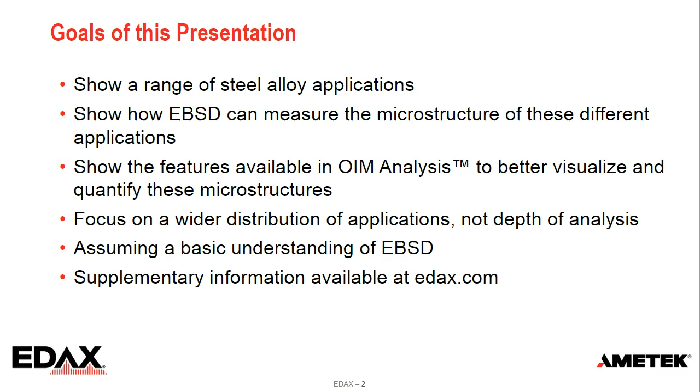I'd like to start by acknowledging a number of people who've contributed to this data: Stuart Wright, René de Kloe, and Will Lenthe at EDAX, John Carpenter, who was at EDAX a few years ago, Suzuki-san from TSL Solutions in Japan, Josh Kacher, Tim Ruggles, who helped on some HR EBSD work, Tom Voisin from Lawrence Livermore on some additive manufacturing samples, George Vandervoort for some nitrided steel samples, Tracy Nelson from BYU for some friction stir weld results, and Ryan Dehoff from Oak Ridge. And of course, this list is not comprehensive. As Jonathan said, I've been doing this for a lot longer than I like to actually count now. I've had conversations with people in the steel industry using EBSD and OIM, talking about their different applications, and bring a lot of that into putting this together.

So why steel? Why did we pick this? It's the most important engineering construction material in the world. And this comes from theworldsteel.org, these values that we'll go through.

When I've looked at it, I do a lot of work trying to see where EBSD is being used via publications. Somewhere between 57 and 65% of the papers published last year, looking at either Science Direct or Google Scholar, involve steel, at least as a keyword. So it's a lot of applications, a wide range of applications of microstructures.

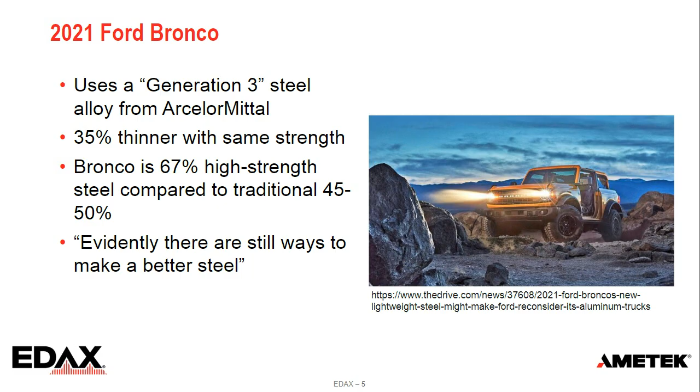To start, I wanted to talk about some friction stir welding and show some examples from a steel sample. If you're not familiar with friction stir welding, it's a solid state welding technique. It's of interest for steels because it works with dissimilar metals, can be used to weld steel to aluminum, and the mechanical properties come out better compared to other alternative welding techniques. There are different microstructural regions, and they make really pretty pictures for EBSD, as you'll see.

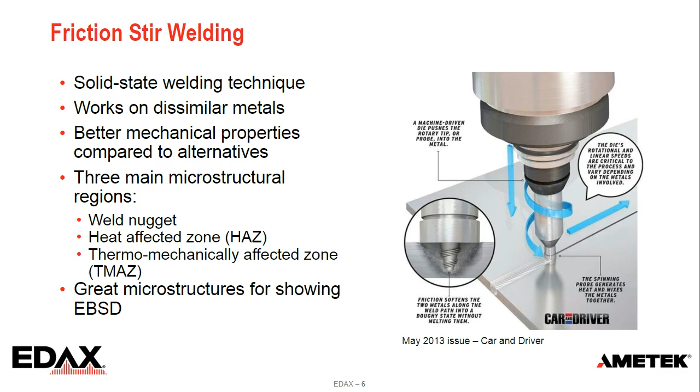You can kind of see a little diagram here of how this goes: the tool is pushed into the metal that's being joined. It stirs around, and the friction and the heat creates a doughy type structure. So it mixes things without melting - it's a solid state technique. This is from Car and Driver magazine that covered friction stir welding a few years ago.

This is an example from a friction stir weld, a stainless steel alloy, using what we call a montage scan. So it's covering a large area, 31 millimeters by 7 millimeters. Basically we take a field of view, collect the data, move the stage, take another field of view, repeat that, and when we're done, we stitch them all together to see the microstructure. This is looking at an area with a 10 micron step size.

The map I'm showing here is what we call an orientation map, where the colors correspond to the orientation, in this case coming out of the surface normal direction. That will be the standard direction we use in the presentation unless I note otherwise. We have the little colored stereographic triangle that shows how the colors correspond to orientation. If it's red, it's an 001 cube face orientation for the cubic faces in steel. If it's blue, it's a 111. We see the weld nugget there in the bottom center, a bit on the top where it's transitioned, and the base metal to both sides.

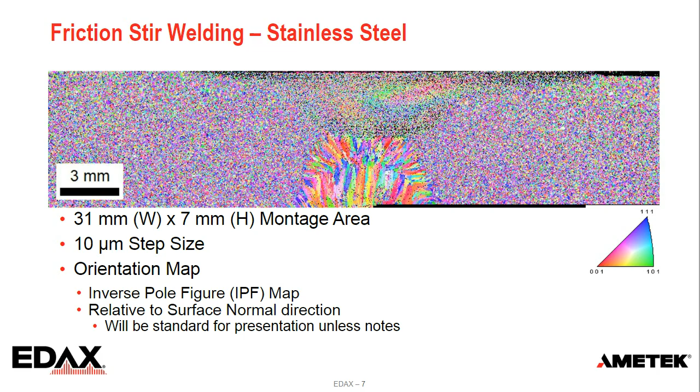If we zoom up along the interface, this shows what we call our image quality map. Image quality is a measure we get from measuring the average intensity of the detected diffraction peaks in the Hough transform. We measure that value, then map the variation as a grayscale image, and see different contrasts.

We can see an example of this from a different steel - this is a partially recrystallized steel. IQ map contrast can come from phase contrast, which is just a difference in scattering from atomic number. It can come from, the generic term is strain - as we deform the lattice, the diffraction is not as sharp, so the peaks are not as bright. Crystallographic orientation also matters: some orientations will have more lines or more poles in them, so they'll end up brighter in the Hough transform. Also topography and grain boundaries.

As we come closer to grain boundaries, the patterns can start to overlap and the overall intensity decreases. This slide shows an example of a recrystallized pattern and a deformed pattern. You can see the sharpness difference.

You can kind of see the intensity difference, but if we map that out on a grayscale map, you can clearly see the recrystallized grains are bright and equiaxed. The deformed grains are much darker and more elongated in the microstructure.

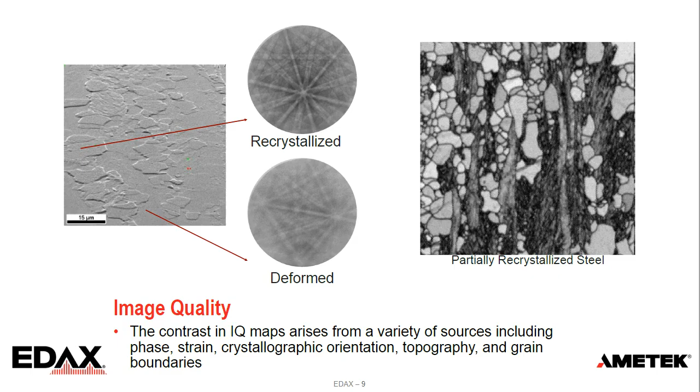Once we have those orientations, what we do with EBSD and with OIM is we typically calculate grains. When we talk about grains, we define a grain in terms of a tolerance angle and a minimum number of pixels.

So if we have our measurement grid, and we typically measure things on a hexagonal grid, this puts more of a packing factor of measurement points on a specific area. Each point has 6 equidistant neighbors, so we can sample more neighbors of the same distance for local kernel measurements.

We'll talk about that when we talk about some of those metrics. So we start with our first point that has some orientation. The orientation is shown by a little unit cell, and we've colored it red.

We check the next pixel. If the misorientation between that pixel is less than our tolerance, then we say it's within the same grain, and we repeat this process. We check this one, it's still within the same grain. We check this one, it is not within the same grain.

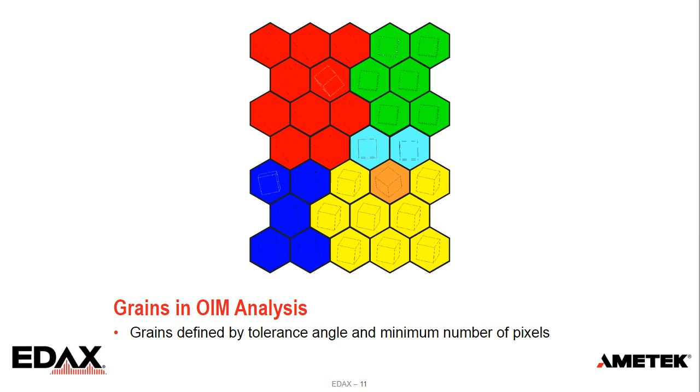As you go to smaller and smaller step sizes, you're able to resolve finer and finer grains, so being able to adjust that threshold matters - if you go to coarser step sizes, that may require a different threshold.

Once we've determined the grains, we can then randomly color that. We call this a unique grain color map, or just a grain map. The colors are such that no 2 adjacent grains have the same color, so it really shows morphology, the size and shape of the grains.

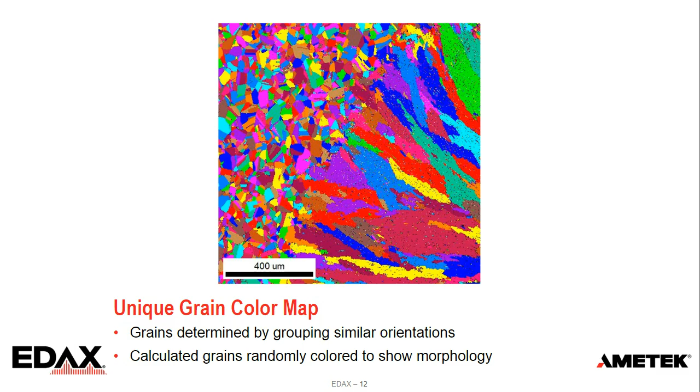We can define this grain size distribution a number of ways. I think the default often that people think about is in terms of diameter. That's an easy one to get out - that's the default, is to show diameter.

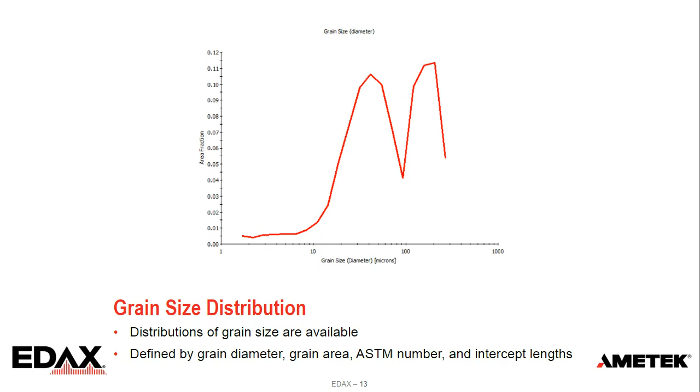But of course, as we look at some of these grains and grain shapes, diameter doesn't always make sense when they're non-equiaxed grains. So we can do grain area, ASTM numbers, intercept length - there's a number of different ways of representing grain size that can be applied to the particular microstructure. And then we can do some fun things to try to link these together.

So this is something we call interactive analysis. I've just gone into that histogram on the left, the grain size histogram, and drawn over a color scale. The smallest grains are yellow, mid-range grains are blue, and the largest grains are red. Once those colors are applied to the histogram, they can also be applied to the map.

So we see that there, and sure enough, the weld grains are larger, they're red. The base metal is more in the middle range. The small grains are there, yellow, but there's just fewer of them and they're smaller, so they're harder to see.

The other thing I'd like to point out, with EBSD we have the choice of including or excluding the edge grains. These grains that we see touching the edge, we're not measuring the full grain, so mathematically you probably don't want to include them in your distribution. But from a map, it makes it look better to color to the edges - it looks a little weird if you throw them out. So that's why I've shown them this way.

But if I'm trying to extract it correctly, I generally will exclude those. And I highlight the coloring scheme. This is when I make my typical joke that I'm colorblind.

And Stuart Wright, one of our programmers, has decided to make the first two colors in a lot of our color palettes red and green, I think because I beat him in golf once.

But we have the ability to customize and adapt coloring schemes depending on what we want to show. I'll show some examples of this.

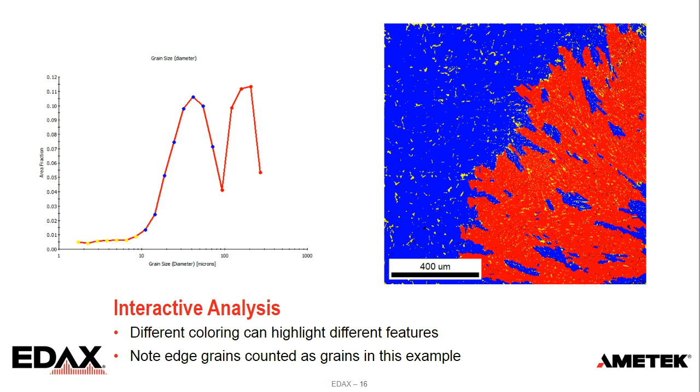And once you've done this highlighting, we can create what we call partitions or subsets of data. In this case, I've taken just the middle region and said everything that falls into this, let's take that as a subset of data, and then we can do our own analysis.

So I could look at, say, the grain size or the texture just from that data. We could also take anything that was not highlighted and create another partition to compare those really easily. As we talk about some of our phase analysis, there are times we do stuff like that, and I'll talk about that in a few slides.

One of the things EBSD really excels at measuring are grain boundaries and what I've called here the location and character of grain boundaries. What that means is we can tell what the misorientation between 2 pixels are - we measure that angle. We use that when we created the grain tolerance angle.

So if it's a misorientation that's between, say, 20 and 25 degrees, we can color it one value. If it's between 40 and 50 degrees, we can color it another value. So we can measure lots of grain boundaries with EBSD. It's really the most efficient tool for looking at this orientation information because we can look at a large area with fine spatial resolution.

And so here we've used a color scheme across the entire misorientation distribution. We see where they show up in the map.

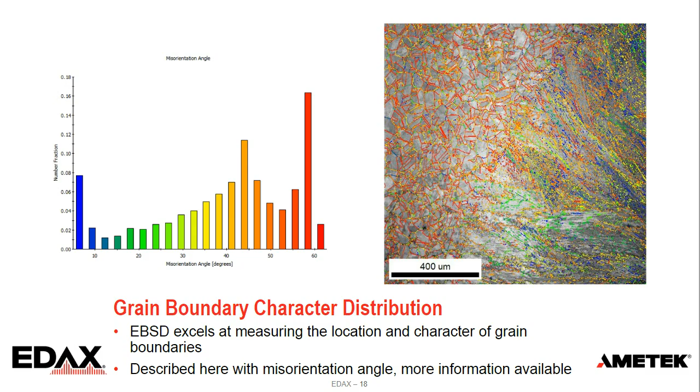We can also measure local misorientations, and it's a little tricky how we choose to describe this. Sometimes it's termed strain. It's really not strain, but that's what it's called, or plastic strain. But essentially, as we permanently deform a material, it introduces misorientations.

And if these misorientations are large enough to be detected with EBSD, we can count them. Typically for regular EBSD, our precision is somewhere around 1/10 of a degree. So when misorientations are higher than that, we can start looking at how they're distributed. We do this in a map called a kernel average misorientation map, or KAM map, where for every pixel, we look at the misorientation between its 6 adjacent neighbors, and we take the average and color it accordingly.

The color scale used here: blue is basically a 0 misorientation. Red would be essentially 5 degrees, and we use 5 often as a cutoff. After 5, it starts to be more of a higher angle, maybe a grain boundary. We can see in this map the weld area has a higher KAM value, a little brighter in the top right than on the base metal to the left, but there's still a good deal of KAM strength throughout the microstructure. We'll show some other examples of how we can count these misorientations.

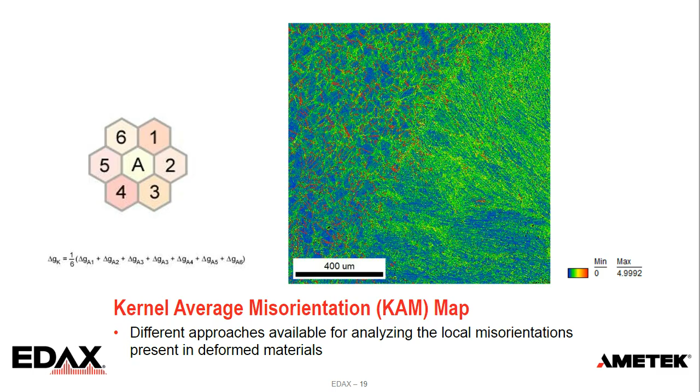We'll also show some examples of going to higher precision with HR EBSD.

Now, I started off with this very large data set to get an idea of a large scale of data. Once we have that data, we can also do cropping. So I've just come in here and said, show me a region of the base metal. It gives us an area. In this case, it's just a rectangle we've pulled out.

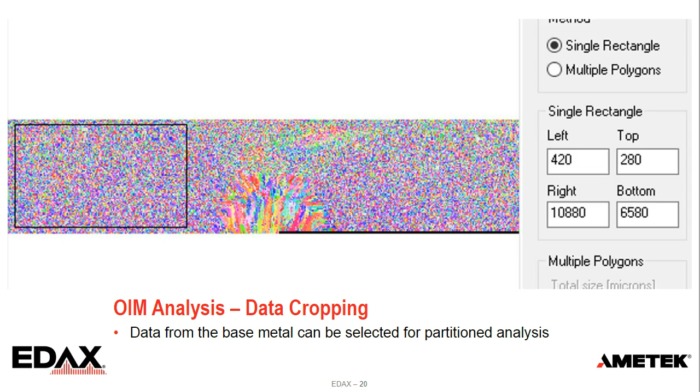Once we have that, we can do what we call texture analysis. Texture analysis is just looking at the orientation distribution of the measured orientation. So it fits a function that describes the distribution. From that, we can get an idea of what we call the strength of a preferred orientation. I realize I didn't put the color scale, but essentially...

These colors on the pole figures, these images on the right, are what are called pole figures, which show the stereographic projection of the orientations onto the sample reference frame. The center of the pole figures shows the sample normal direction. The A1 shows the top to bottom direction, so A1 is the top of the map, and A2 is the left-hand side of the map. If you use your right-hand rule, you'll see how that aligns with the map.

So what this shows us, if we look at the 111 pole figure, is there's a strong peak in the center, a little bit offset, coming out the center of the sample. That's why when we look at that region, there's a good amount of blue. If we had the scale bar, we'd be able to tell how strong, how much over random that distribution is. We can see it's sort of annular around that, what we'd call generally a fiber texture, at least close to a fiber texture. It's got some funny shapes to it, but we can see it's more randomly distributed around the clock face of that 111. That's what texture can show us.

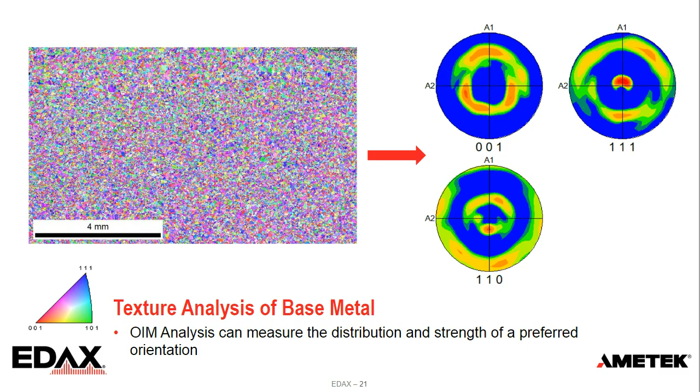I can also come in and crop. I did my best to crop the weld nugget, so it wasn't a rectangle - it's what we call a polygonal crop, trying to crop out those weld nugget grains. Looking at the texture of these, we see it's quite different. There's more of a 001 alignment along the A1 axis.

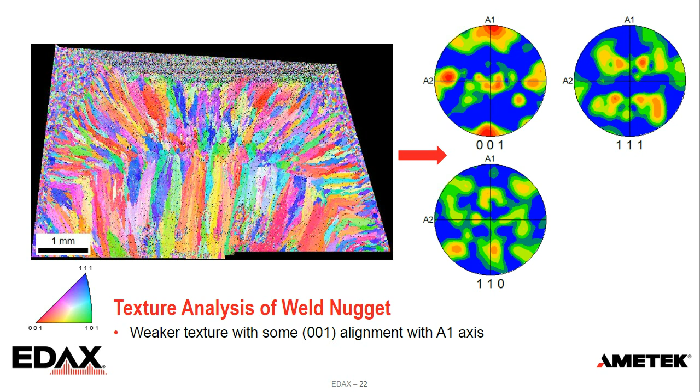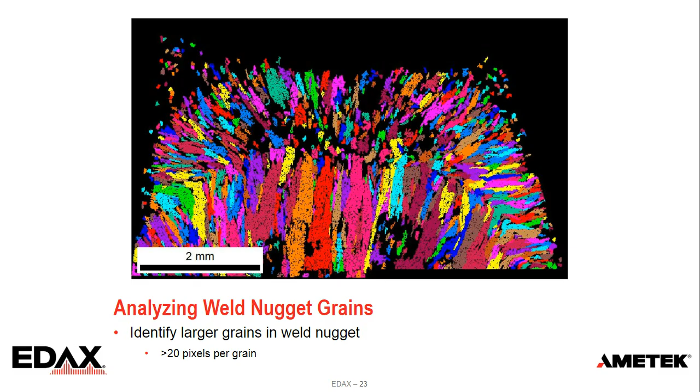Once I have those grains identified, I then fit an ellipse to each grain. So here we fit an ellipse, we determine a major axis and a minor axis, and an angle between the horizontal and the major axis. I've just shown those ellipses in white to show how they fit those elongated grains.

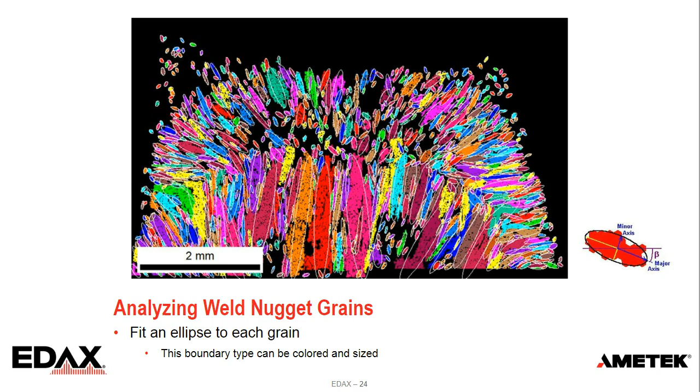So when we're looking at grains, we can get an idea of their shape and shape distribution. But from this, what I'm now doing is, if we look, we can see where the major axes are - I'm showing what crystal orientation is aligned with the major axis. We can see that most of these, or at least a good number, are trending towards the red direction. That gives us an idea if some of that grows preferentially as the grains grow in that direction.

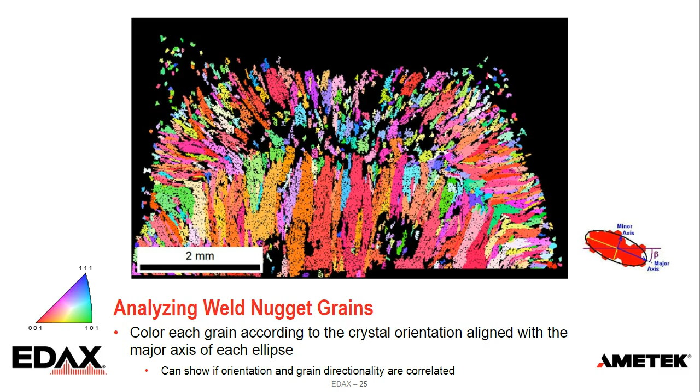And we can see there are a number of grains aligned top to bottom in that 001 axis, which explains that orientation distribution in the pole figures.

So I want to jump to the next application, which is additive manufacturing. I hazard a guess that if you're listening to this webinar, you've heard about additive manufacturing. It's certainly a strong buzzword and market of interest receiving a lot of attention. But additive manufacturing is basically a process where we build up parts, where instead of removing material, we're adding material to create a shape. So this is just an example.

This is from Malvern Panalytical, where you have a bed of powdered material. We hit the powder, in this case with a laser, but both lasers and electron beams can be used. It fuses the powder particles together and solidifies them, so we can use the laser to raster out the area we're interested in. Once the layer is complete, we drop the build platform down, reset the powder on top, and do another layer. So we can build complex shapes generally pretty easily with additive manufacturing.

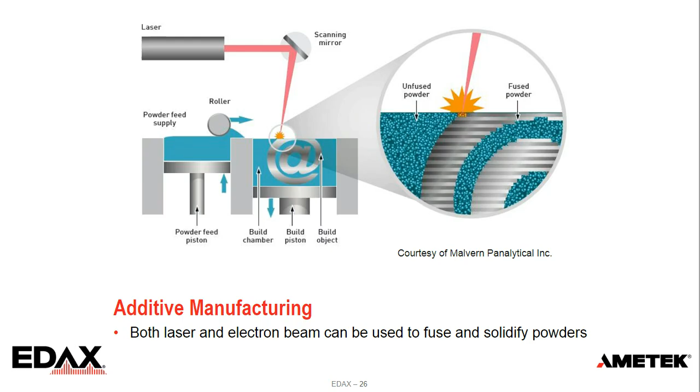So this is just an example using laser powder bed fusion. This is a 316L stainless sample. This shows the orientation map. Again, this is a large-scale montage map, but it's showing what's termed the horizontal build direction. In that case, what it means is that the layers are building up towards us, so we're looking at the very top layer after fabrication.

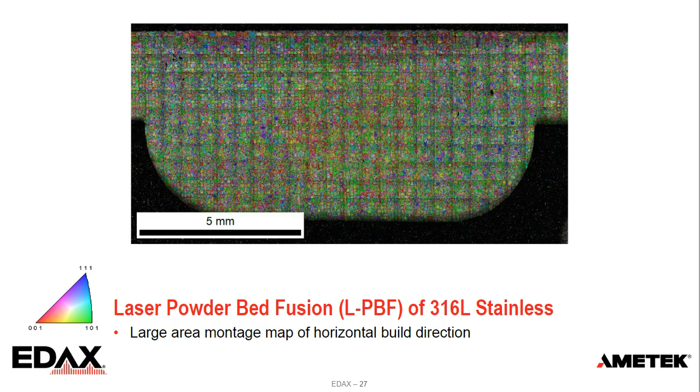You can kind of see there, these are the greenish colors - I hope they're green, this is where my color blindness will hurt me, but they're, to me, a greener color. Whereas if I compare that to what's now termed the vertical build direction, this is where the build plane passed left to right, not out of the plane of the surface for this particular sample. So if we look at those, you can see the shape of these two samples is essentially the same, but they were built in two different directions.

And that's important because if you were to look at a part and if they look the same, you wouldn't realize that, hey, the mechanical properties are actually defined by the microstructure. And if the microstructure is different from one to the other relative to the shape of the part and the directionality of an applied load, you can get very different performance. That, I think, sparks some of the interest in understanding the microstructure of these 3D printed parts.

So looking at these in a little bit higher magnification, you can see that the microstructure is very different between the horizontal and vertical directions. And this is essentially parts of how the energy beam interacts with the particles, the solidification and heat transfer rates going through things, and then how it goes from one layer to the other, the direction of the rasters - there's a lot of things going on in there.

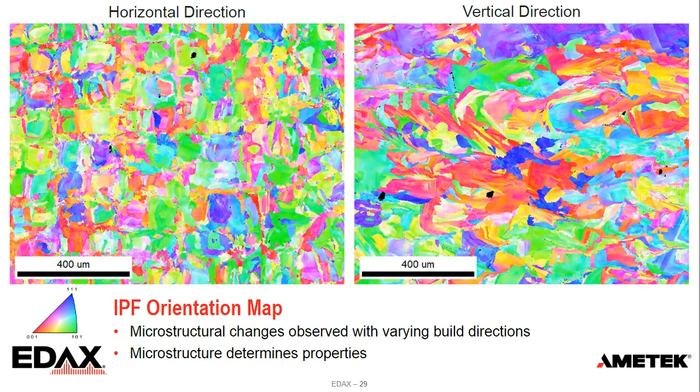And again, if you're able to adjust your build parameters to adjust your microstructure, and microstructure determines properties, being able to measure your microstructure is a key component in really moving forward with this. And this is just a really good example - this is from Oak Ridge National Lab a few years ago. This is in electron beam melting, actually a nickel superalloy, but they varied the build conditions to actually write DOE into the microstructure.

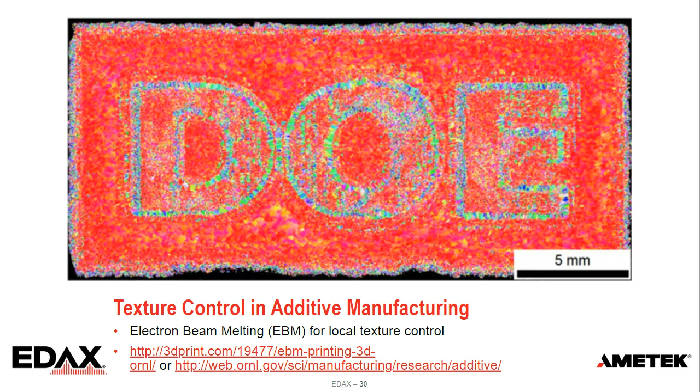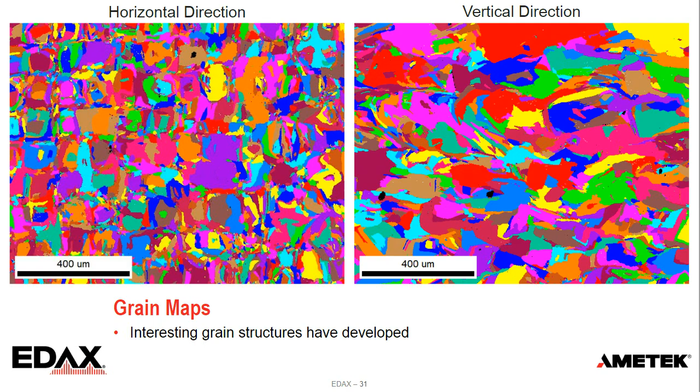In my work, I was looking, or starting to look—it's still in progress—at the structure at higher spatial resolutions. Here we're looking at an area where we can see within some of the grains that the color changes.

There are small changes within a primary color, and that represents small changes in the misorientation. So if I look at this in terms of a misorientation profile...

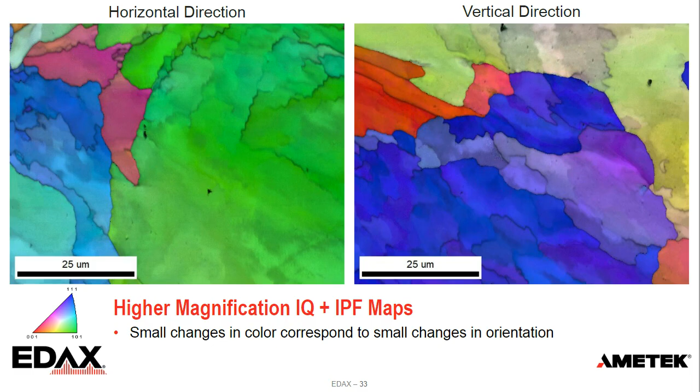You can see on the left I've drawn a line from the bottom to the top within that single grain. I've overlaid unit cells along that profile line. You can see that along the line there are small changes in orientation, and we can see that on the profile on the right, the misorientation profile.

The red line shows the point-to-point misorientation. From point to point, the misorientation isn't changing a lot, but if we look from the bottom to the top, there's a cumulative effect of how that misorientation has developed throughout that grain. There's some structure to that misorientation.

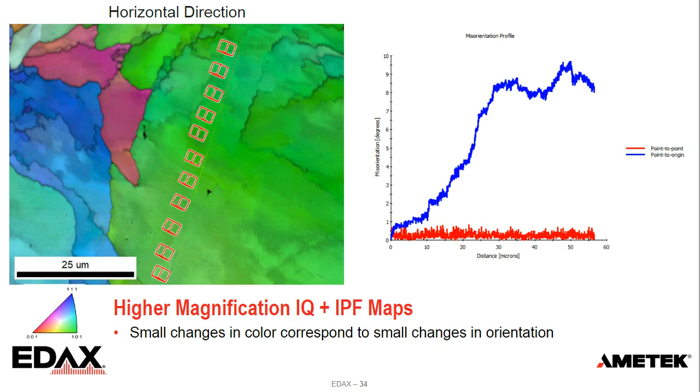We can visualize that with other types of maps. One is what we call a GROD, or Grain Reference Orientation Deviation map. In this case, what we do is calculate a grain, like we showed earlier.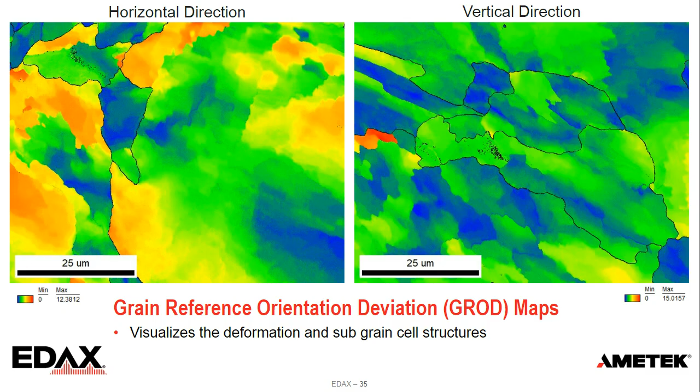Within the grains, you can start to see a cell subgrain structure, kind of a fingerprint of the deformation. We can compare this to TEM results.

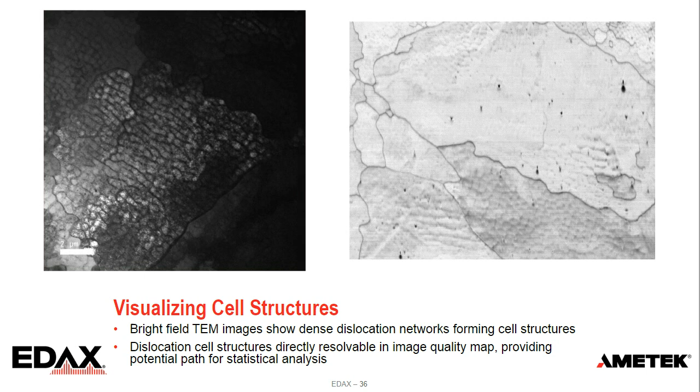This is a bright field TEM image on the left, and you can see that cell structure pretty clearly. On the right is the image quality map from one of those higher magnification images. You can see we can actually detect some of that cell structure in the bottom just through the image quality as well, which I thought was really interesting.

We can look at this with what we call HR, high angular resolution EBSD. This is a technique that provides higher precision in the orientation data, achieved by comparing two EBSD patterns in a cross-correlation Fourier space, looking for small shifts of features within the pattern. This is in contrast to our standard Hough-based indexing.

This data was collected with our Clarity direct detector to get really high quality patterns, looking to see how well we could measure this. From this you can see the orientation map.

You can see there are some slight color changes in this top grain here as far as variations. And when we do this HR-KAM map, you can see how we start to very clearly resolve where some of those cell walls are present.

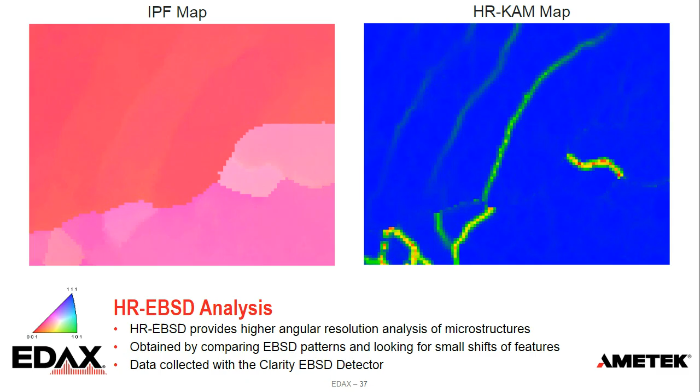This can then be used to measure the GND, or geometrically necessary dislocation density. This is a measurement that's based on, depending on what the misorientation is, a certain amount of dislocations necessary to create that angular change. It's the curl of the orientation field that's used to do that calculation, so we can figure out where the GNDs are present to visualize those.

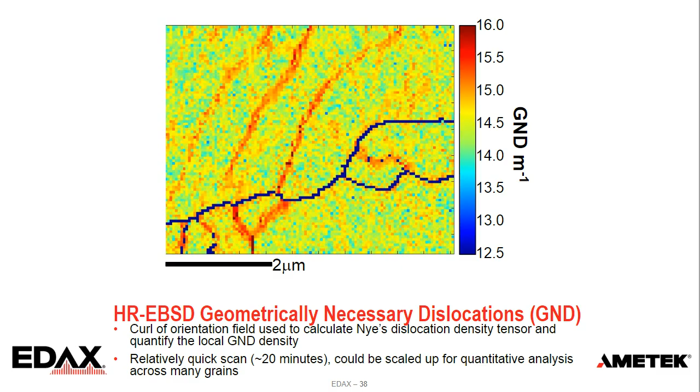Once we have that, we're also able to look at the stress and strain that comes out of that cross-correlation analysis. This shows a profile line going horizontally across some of those cell walls, and we can see the stress state along that, going from a state of compression to tension along different parts of the dislocation structure.

So that's—I want to say it's relatively new, but it's been around for a while now—more information we can extract from the EBSD patterns.

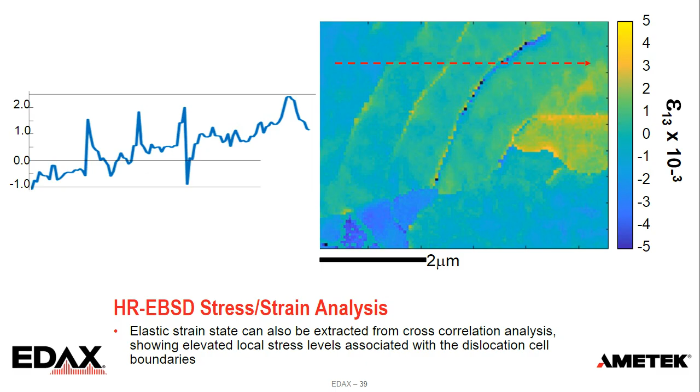The next example I want to talk about is TWIP steel, or twinning induced plasticity steel. You're probably familiar with this curve here, of strength versus elongation or ductility, kind of a banana-shaped curve. A lot of work is going into pushing the properties to enhance both strength and elongation. You want materials that can do both.

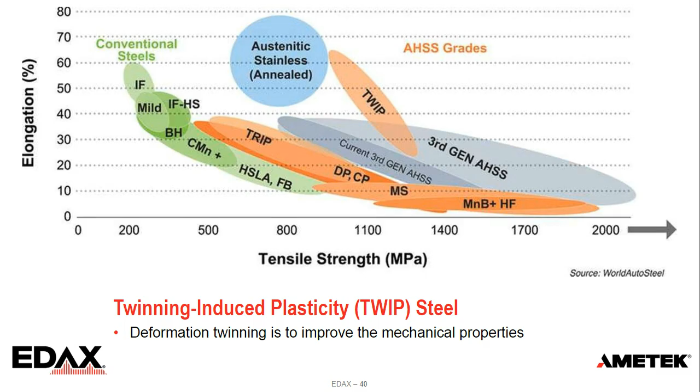This is a little diagram from WorldAutoSteel. For TWIP steels, deformation twinning, and being able to measure and understand that, is what's used to achieve these superior mechanical properties.

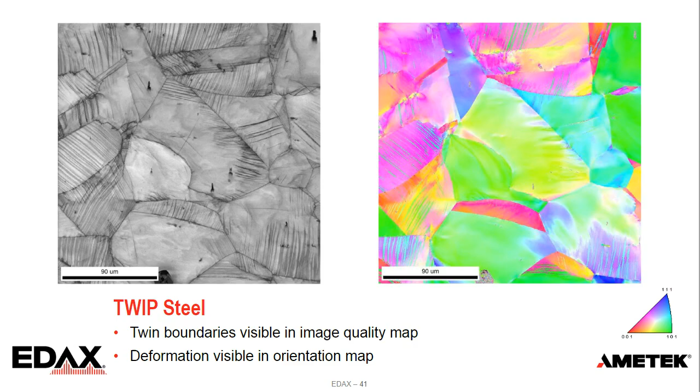This is an image quality map of a TWIP steel. You can see the twins come out as those parallel linear features within the microstructure. We can see the orientation map on the right, and you can see the deformation in that orientation map as variations of colors. I think they're really pretty in terms of variation, but you can see it a lot in this bottom right one where we transition from blue to greens in the triangle. There's a lot of misorientation and twin boundaries present in these microstructures.

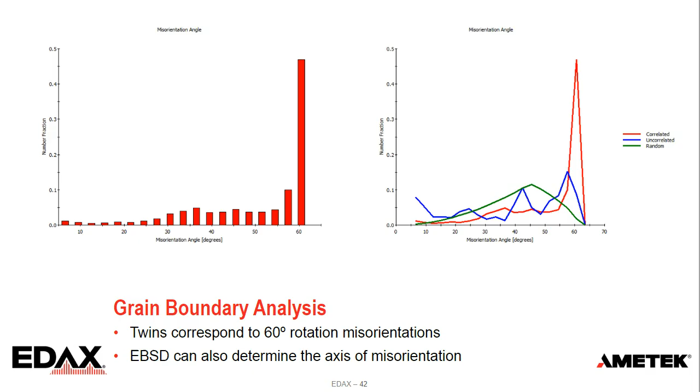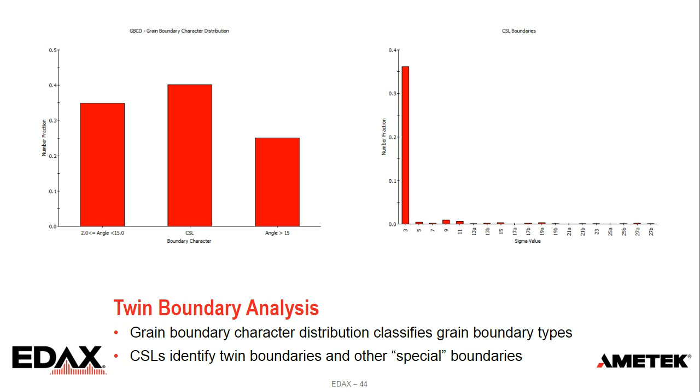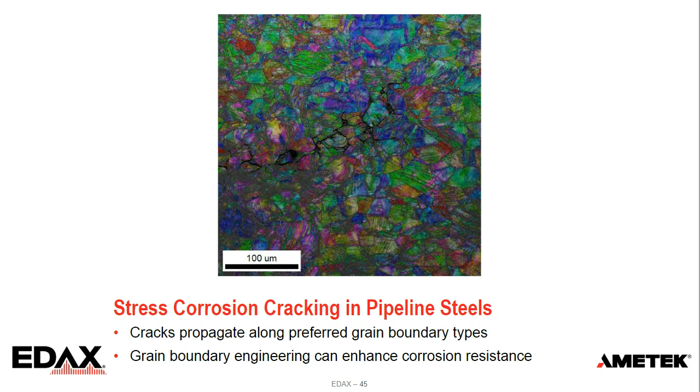This can be important for something like stress corrosion cracking, in a pipeline steel. This is an example of a crack going through a piece of this steel. The cracks tend to propagate along specific grain boundary types, and they generally try to avoid going through a twin boundary. There's work called grain boundary engineering, where materials are subjected to different deformation and heat treating cycles to improve the number of twin boundaries and enhance corrosion resistance.

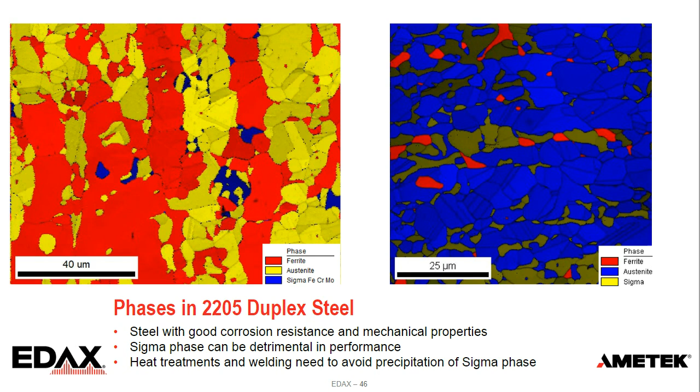In this case, these three phases are crystallographically different. What I mean is, austenite, one of the phases in steel and iron, is face-centered cubic, or FCC. Ferrite is body-centered cubic, or BCC.

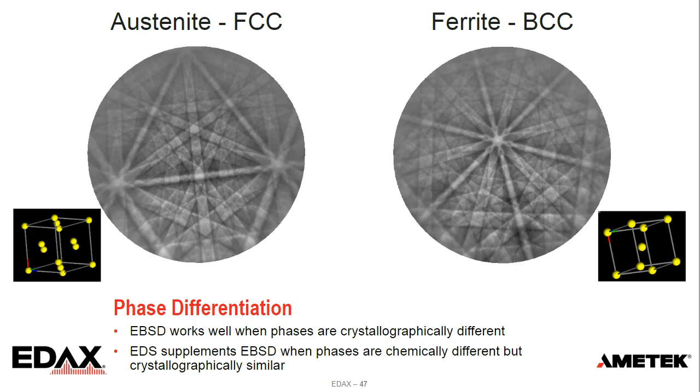They're very distinct crystallographically, so the planes that diffract are different, and the projection of those planes onto the EBSD detector are different. For Hough-based indexing, we're measuring the angles between these planes, so if different planes are diffracting, the angles are different, and it's easy to tell these phases apart. When structures become more crystallographically similar, that's when EDS can supplement EBSD.

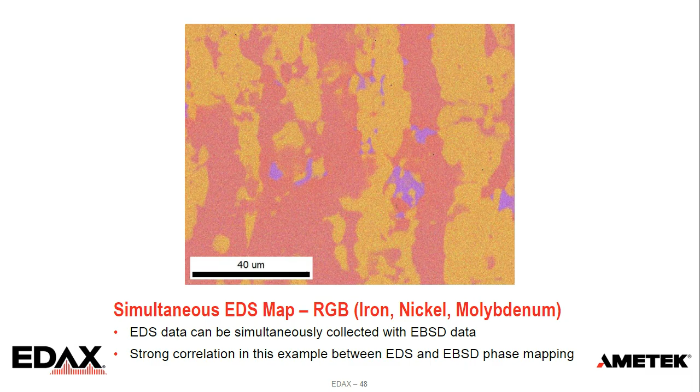So it's very easy to collect simultaneous EDS and EBSD data now in a modern EBSD system. Both the EBSD and EDS detectors and the SEM chambers are all designed with that in mind.

So you can get it, but sometimes it gets to be tricky - sometimes from a physics point of view, sometimes from a sampling point of view.

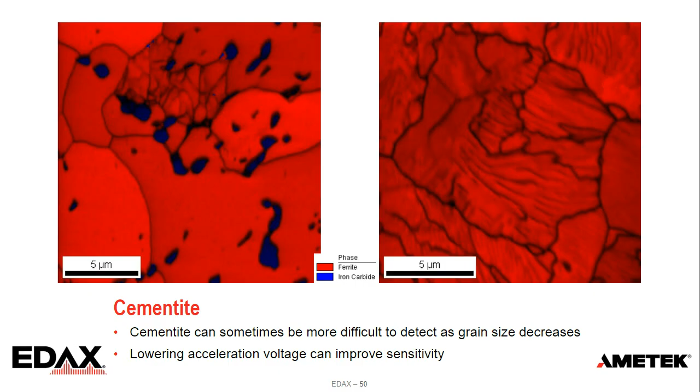This is one we did have a question on that came in before the webinar started, so we wanted to talk about this a little bit. This is a question that's been around for EBSD for a long time - how do we differentiate something like martensite from ferrite? Martensite is body-centered tetragonal, a slightly distorted BCC lattice, distorted from the temperature change and phase transition from austenite into ferrite and martensite, and how that strain is retained in the unit cell.

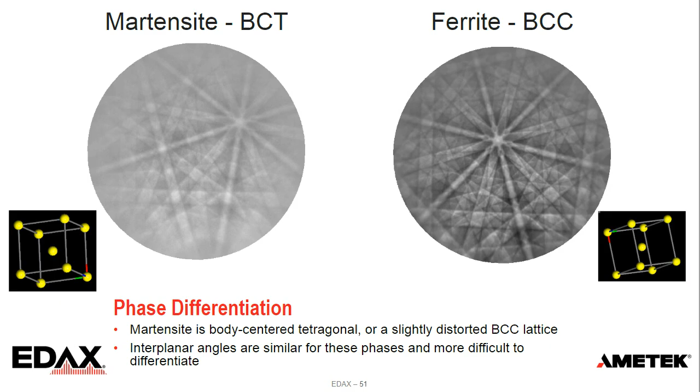So basically that cube is just slightly changed, and one of the tricky things is the slightly can depend on a lot of factors - it's not always uniform in your alloy, and it can vary with local carbon content. So the interplanar angles between these phases are very similar, which makes it more difficult to differentiate.

This shows an example: here's our ferrite-martensite patterns again, but on the image for the martensite pattern on the right, the C image, it shows the white martensitic overlay and the black ferritic overlay onto the same pattern. You can see the white and black lines are essentially lined up, and the shifts between them are very small - very subtle shifts between the two.

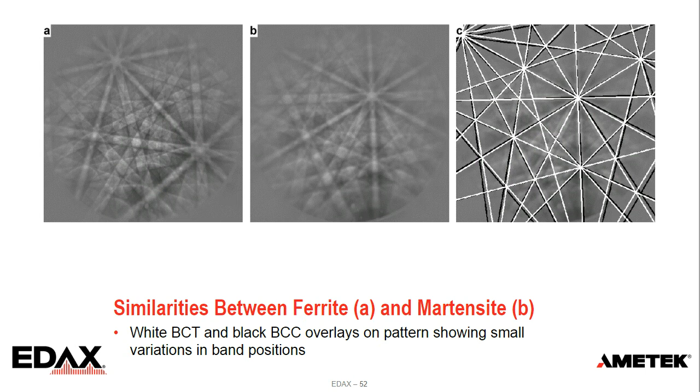So it's difficult for the Hough to reliably differentiate - it can always differentiate, but not always 100%. Traditionally there have been a couple of approaches, one from about 20 years ago from Alan Wilson and George Spanos at NRL, looking at the image quality difference between martensite and ferrite. This has been used quite a bit - you can see a kind of bimodal microstructure, and you can figure out where you want to draw a line.

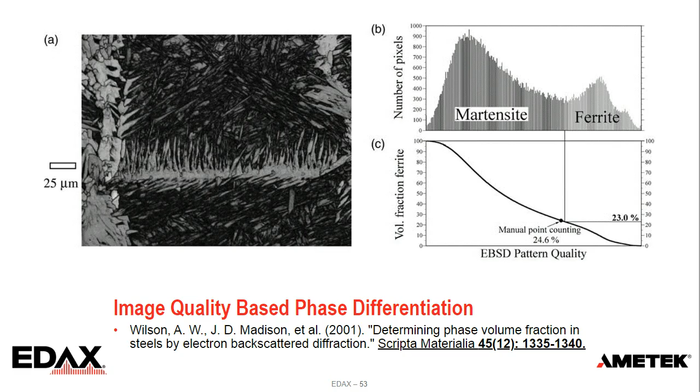This is an example with our velocity CMOS camera, where you can clearly see the difference between the ferrite and the martensite, both by image quality - how bright the grains are - but also the shape of the grains. This is shown because it is an easy example.

As we get into more complex microstructures - TRIP steels and things - you start to throw bainite and other phases into this, and it's not always this easy to see. I don't want to set expectations that this is an easy problem, and there's been a lot of work going into this. People are using machine learning to try to characterize the different distributions.

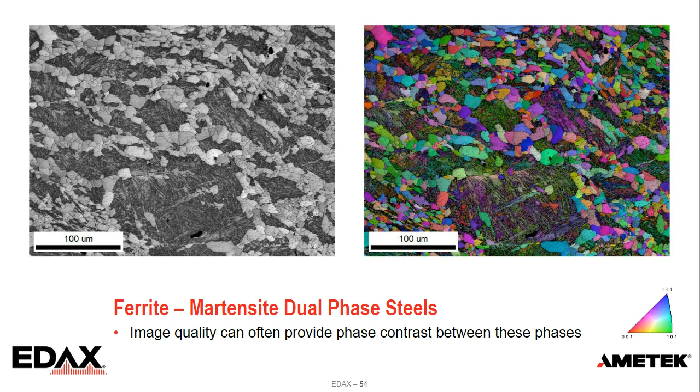So the martensite generally will have a little bit more misorientation. If I put my KAM map here and compare that to the distribution here, you can see there's pretty good correlation between image quality differentiation and KAM distribution. And of course, we're working on other ways of trying to differentiate that as well. I think we'll have at least a talk at M&M about this this summer.

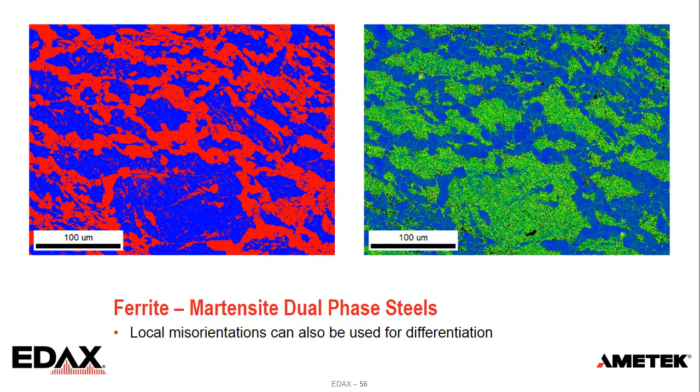This is just an example from a nitrided steel. Nitrogen is used to create a surface layer of higher hardness, which improves wear resistance. This is just an SEM backscattered image of that structure.

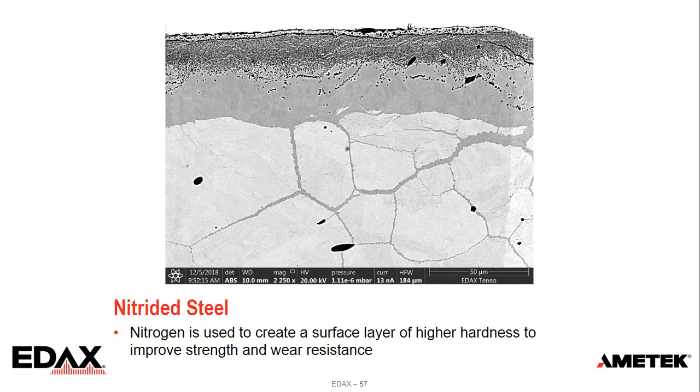So to characterize this with EBSD, first thing I looked at is what we call a PRIAS image. The PRIAS uses different regions of our detector to create different contrast mechanism images. So on the left, we're getting atomic number contrast. In the middle, we get more orientation contrast. On the right, we get more of a topographical contrast. That's again just selecting from the top, center, and bottom of your EBSD detector to monitor the signal in those regions to create those images.

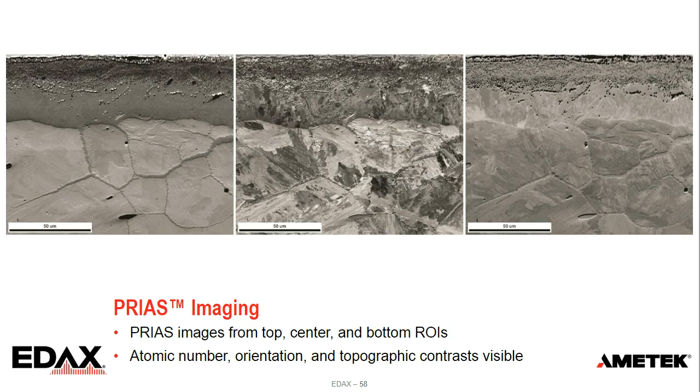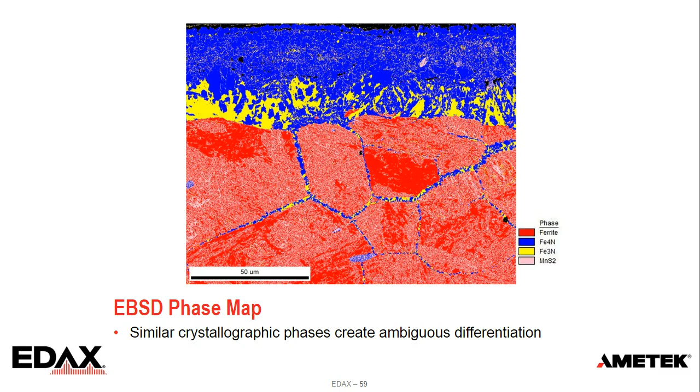There's some speckling within the base ferritic grains. So with that, we use what's called simultaneous EDS collection for ChI-Scan, or chemical indexing scanning.

And then we can use that to select the correct phase for each point based on the chemistry. From that, we can differentiate better the crystallographically similar phases. We can see the true phase distribution, and then we can also start to see how the nitride phases are present on the outer layer, as well as how they're penetrating into the microstructure through the ferritic packet boundaries.

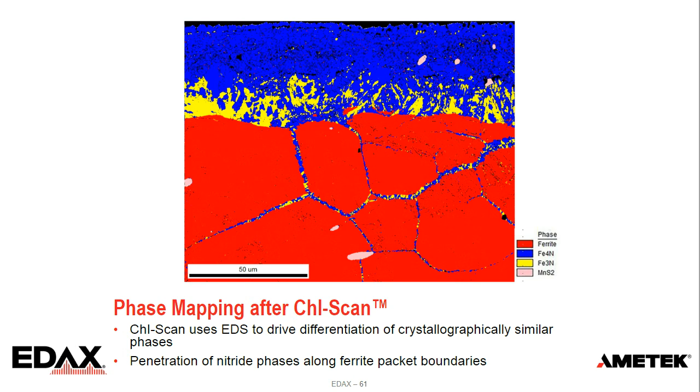And so we can see that in terms of the comparison before and after ChI-Scan. I think this just shows very nicely why using both together is very nice. It's a very easy way of better resolving the phase information correctly. We get a better overall picture, and there's really no penalty for having both.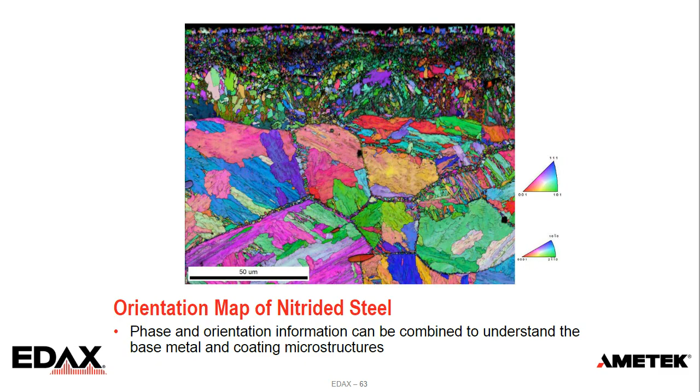And this just comes from the transformation from austenite to ferrite, where these patterns form a preferred orientation relationship in these packets. And so this is another application question that has been around for EBSD for a long time: measuring the prior austenite grain size.

I remember, it was one of my first years, I was looking at tool steels, looking at these pictures saying, we can visually see these, how can we extract the prior austenite grain size? And I've had lots of customers want to do this. We've looked at lots of samples trying to do it. A number of people have tried different algorithms.

And so just recently, we've made some work on our side to implement some of the algorithms that are out there to provide a solution within OIM analysis.

But essentially, what's happening is we start with our austenitic FCC phase at higher temperatures there on the left, and as it transforms through the transition temperature, there are different possible orientation relationships between the FCC austenite and the BCC ferrite. So it can transform by certain rules, and rules with tolerances.

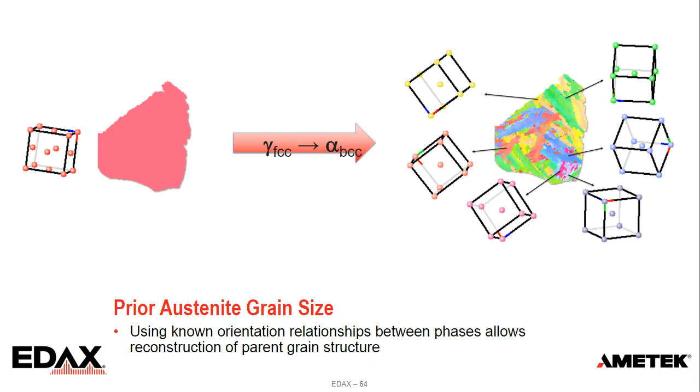But if we know those and we put those into the software and we do some permutations, we can reconstruct the microstructure. That's an example here, going from the as-scan microstructure to the reconstruction microstructure on the right.

This is for prior austenite grain size, so it's useful for steels. It's also been used for titanium alloys in 3D printing, where that's another important feature. I'm not going to go into this in a lot of detail—there's an archived webinar from Stuart Wright at edax.com where he covers it in more detail. But I include it because it's a question we now have a function in the software to address. There's a lot of subtleties, but it's a step in a good direction.

That comes back to this: as we do this transformation, you can also have what's called retained austenite, meaning not all the austenite has transformed. Retained austenite can be an important factor in determining the strength, toughness, and hardness of some alloys. So as we go to look for this, I've

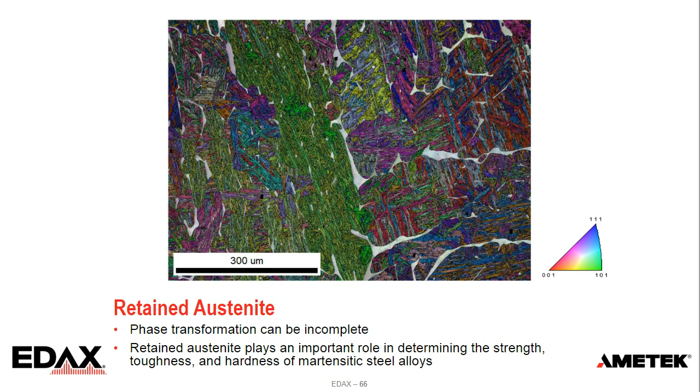sometimes called it a needle in the haystack problem. We want to look at a large area, but also with a fine step size. That's where some of these faster velocity CMOS type cameras are really useful—we can look at larger areas with finer step sizes. So that's what we're showing here, doing 125 nanometer steps, looking at the ferrite and austenite.

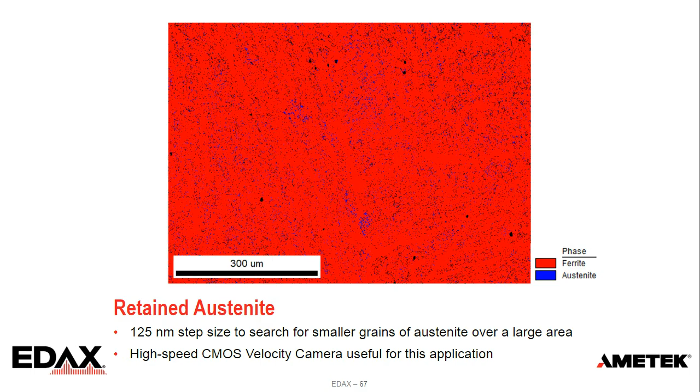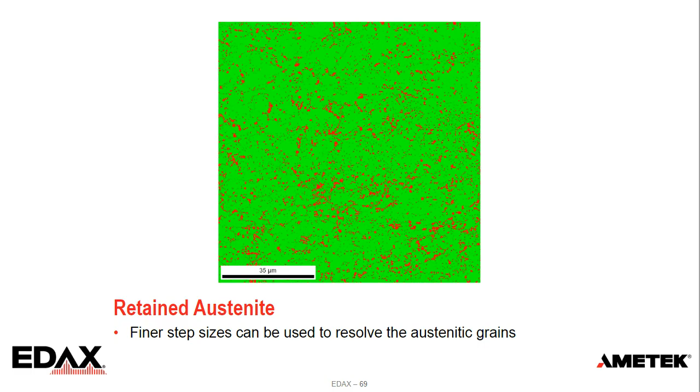And of course, as we go to finer and finer step sizes, we can resolve more and more of those grains. So it starts to become a sampling statistic kind of approach, of how to best do that.

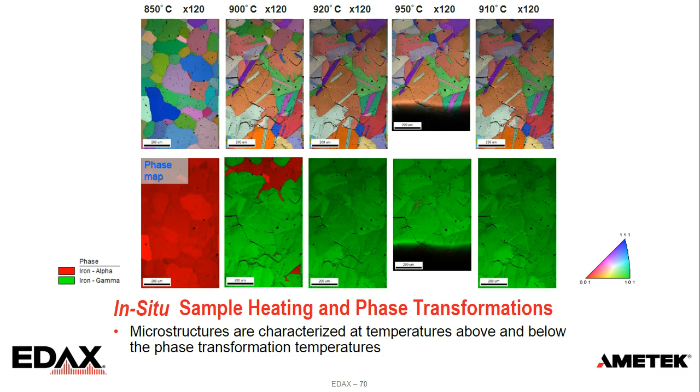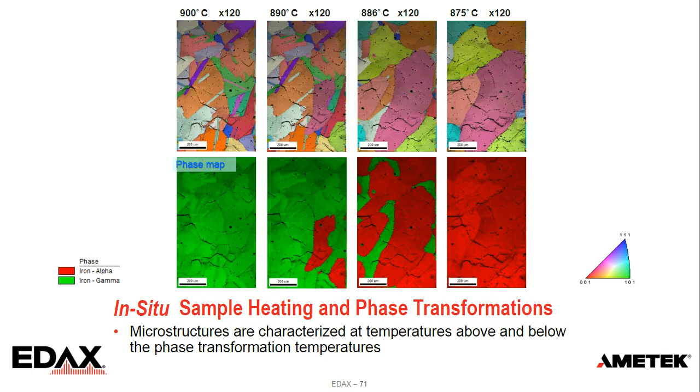Through all this, one of the things we can do is in situ analysis. This is an example of work by Suzuki-san over in Japan, where he's done heating of a steel through the transition temperature. We start here in red, come up through it, it transforms into the green phase, and then as we go back down, it comes back to the red phase. We can control temperatures going up to the 1,000 degrees C range to observe these transformations in situ.

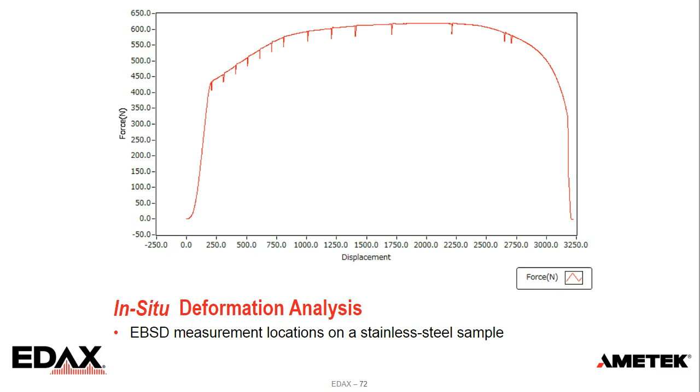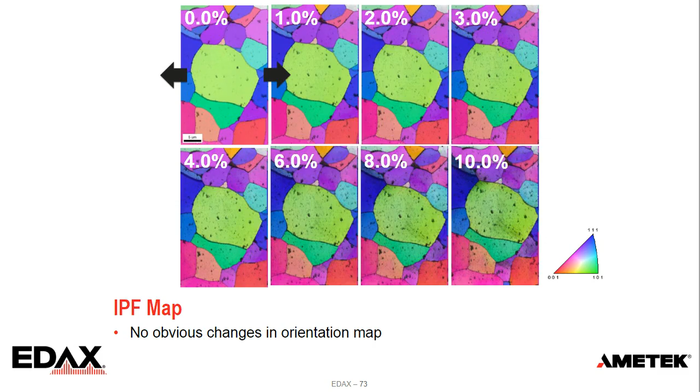We can see, with the amount of deformation, how the microstructure evolves as a function of deformation. If we look at the orientation map, you'd be hard-pressed to say you see a huge change in these particular maps. If we look at it with our KAM, or kernel average misorientation map, we start to see it a little bit—the top line shows our first order kernel, the bottom line shows the fifth order, so we're stepping out further.

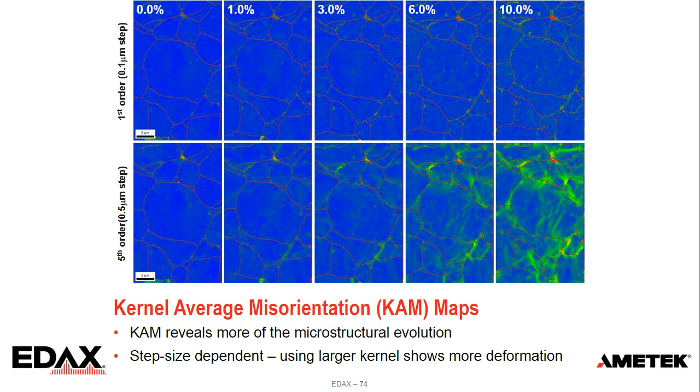When we're looking at these step point-to-point misorientations, it can be very dependent on step size and the size of the misorientation gradient. Again, if our step size measures things with finer precision than we can measure, we'll see a bit more blue. That's why we can expand the size of these kernels to see more clearly the orientations or misorientations. Then we could use something like our GROD maps to show a grain-based measurement, so we see how that particular grain bends and evolves as a function of strain.

I'd first just like to say thank you. It's a wide range of things we can use EBSD for on different steel applications. EBSD is really an ideal tool for characterizing a lot of these different microstructural features: the grain boundaries, the phases, the local misorientations, the orientation, and the software OIM analysis. There's a lot of tools built into there—we can create a first level map, do interactive analysis, partitioning, texture analysis. That really allows us to look at these in different ways and extract information that's important, which can help drive the continued development of these advanced steel alloys.

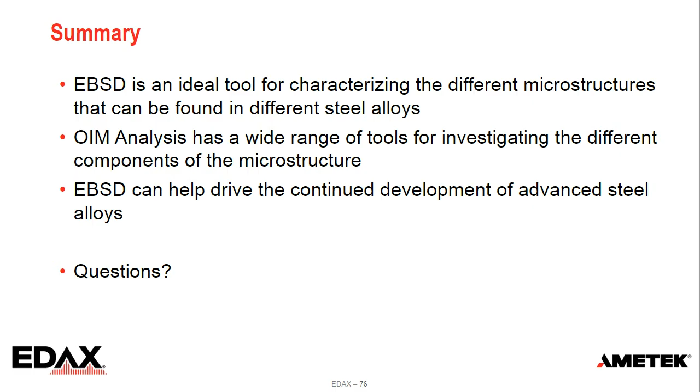There's a question that says, on slide 49, is EDS mapping superimposed on the image quality map? I'm going to go to that slide to try to answer that. I'm guessing the answer is going to be yes. Yes, in both cases those are superimposed, just to provide some level of grain contrast.

One of my friends from Japan, Yoda-san, very nice to have you on, and a question from you.

Do you have any problems getting a large area montage? I heard it is difficult to measure a large area montage with the OIM DC.

In general, I would say no, there are not problems. You're always trying to fit together the sections, and it depends on the seaming of the detector. The biggest problems you can have with montage, the two that come to mind - first, you ideally want the top and bottom of the sample to be planar. You don't want a sample that's off, because we're trying to move the stage to keep the sample in focus, and the more that plane isn't flat, the more corrections we have to make, and the harder it is to get the corrections right.

The other thing that's tricky is making sure that your system and your microscope are paired together in terms of how they're measuring distance. Because we tell them the microscope stage is moving 100 microns, and if the stage thinks it's moving 100 but the image thinks it's moving 98, there's a 2 micron difference. If you're looking at 2 or 5 micron step sizes, that's generally not a problem. But at other scales, sometimes you'll see that the matchup between the seams of those different tiles is not perfect.